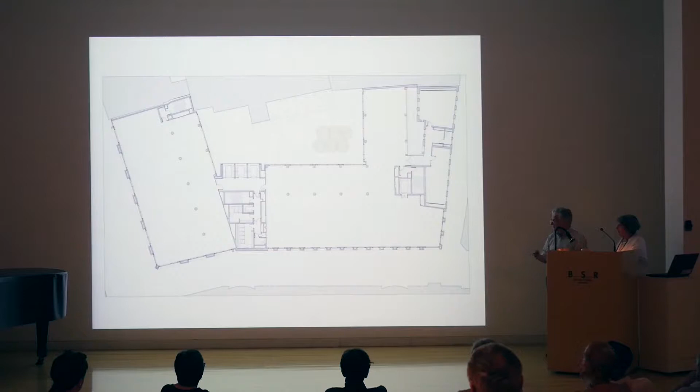This is the ground floor with the main entrance, the route to the courtyard, some simple office space on the ground floor, and the old buildings retained at the back. The main thing about offices, as I said, is the discipline. We have to reconcile straight commercial buildings, worth a huge amount of money in London, with the demands of architecture, urban design, and the street.

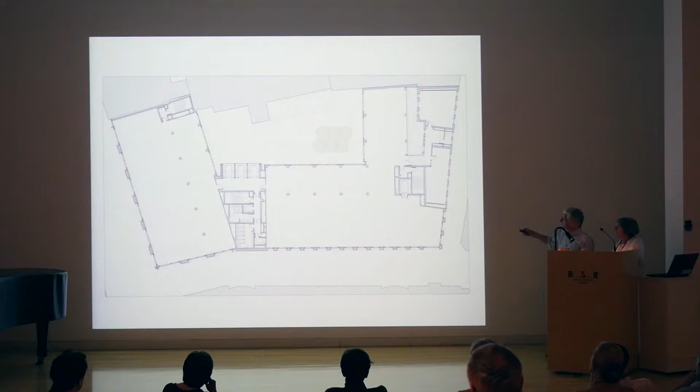So here we have simple rectangles to make up the commercial space, and a lot of planning goes into all of these. They make the angle turn the corner with the stairs and lifts, and they dovetail into the rear of the site with a small top-lit space to make the gap between the new building and the old building.

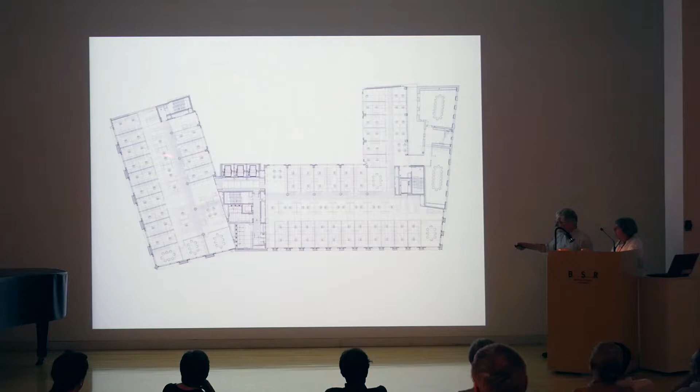This is the kind of thing that goes on inside office buildings, which I'm sure you all know, but this is for lawyers. Lots and lots of simple offices, three meters apart, must be six meters deep. We must have circulation here, a certain density, a certain cost. So we're working within a highly disciplined, demanding commercial environment to make something good for the city.

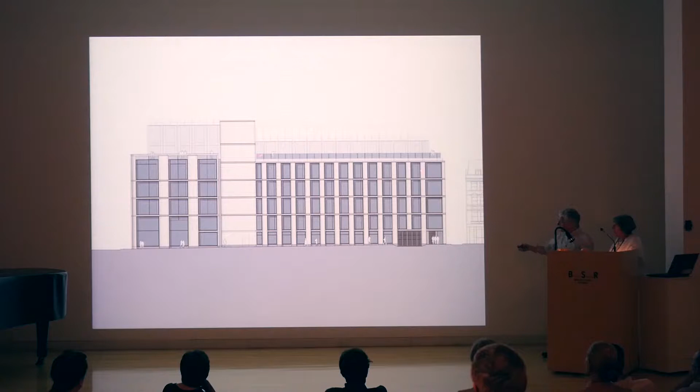So we try to reflect that in the facades. On the main street, called Chancery Lane, we have a larger scale to reflect its importance. On the side street we have a smaller scale, and it drops in height from seven stories to six, and round the corner to five and then four. On the main street, you never really see this view because you look up the street and down the street, never straight ahead.

The main element in the entrance is the courtyard, not the front door to the building, which isn't obvious when you're there—you go into the courtyard first rather than choosing to enter the office building directly. The scale of the building is different on this street compared to the side street. But then we built it.

Now this is where the surprising connection to Rome comes in, because we have this wonderful Roman travertine on the facade of the building, which comes from just down the road here. What we're trying to do is clad the building in a way that completely faithfully respects the structure inside. So this isn't just facadism, it's not just a veneer—it reflects the structure, the space inside, its energy consumption, its use, and so on.

So I wanted to take you through a little journey about how we made this facade.

So here we are in Tivoli, not so far away, and we discovered there were different choices of stone. One could have been a North European stone, a British stone called Purbeck, or Portland stone. Another could have been travertine.

The thing we were thinking with travertine is it can sometimes be a little bit too uniform. But we discovered in this quarry an amazing single quarry which has a grey stripe right through the travertine. It's quite extraordinary - if you look at the blocks which come out of it, it's called oniciato, I think. You get this amazing swirl in the travertine, which I've not seen anywhere else.

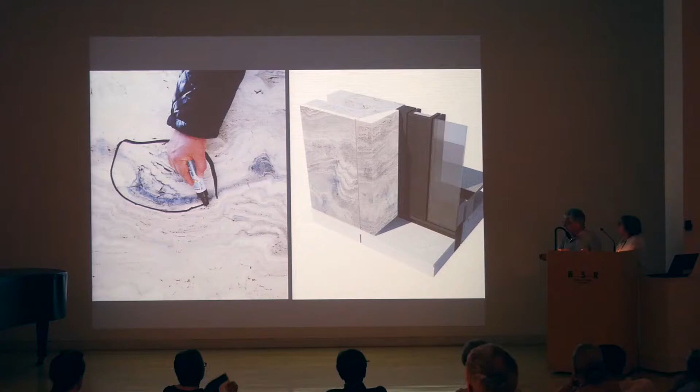Now, if you clad buildings with stone, which we sometimes do, it's always very unsatisfactory I think to see the thin edge of the veneer on the edge of the stone, maybe only 25 or 40 millimeters thick. So we wanted to give it greater substance. This piece on the corner is 120 millimeters thick, and it goes right the way through - you can see it's solid stone because the vein goes right around the corner. So it has the feeling of real quality about it, a little bit like the older buildings here, which are built of travertine too, of course, but there's a concrete structure behind with insulation in the gap.

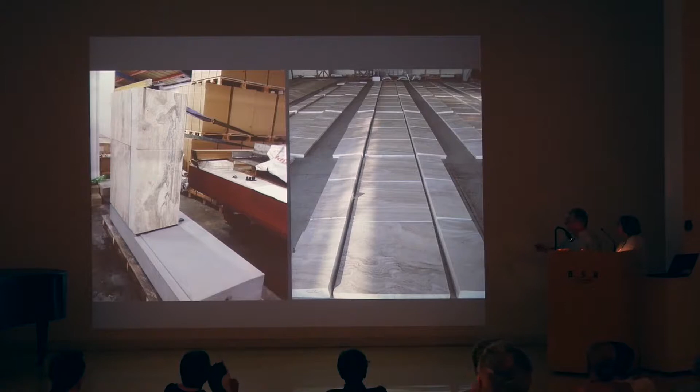Then we built a real mock-up, partly in our courtyard in the office and partly in the yard with the precast guy. And then we had Campolonghi from Pisa - I don't know if it's a company you know, but they're easily the best of the Italian stone manufacturers, we think. They took the travertine blocks, cut it into slabs in Pisa, laid it out in their workshops, and we could then arrange the slabs in different compositions to make sure we got a good balance of the crazy stone with the vein in it and the plainer stone in different parts of the panel. So an enormous amount of care was taken in getting this right.

And Alison went through this yard about 11 or 12 times over the period of 2 years to select the stone and get the guys to move it from one place to another. But of course the result is, I think, pretty good for the street.

This is the street taken looking south. You see the older buildings are all masonry. The windows are very deeply set, like most historic cities, so you don't see the windows, you don't see too much glass. So we have this pattern going up the street, and here we are with our building.

Now this facade is 0.5 meter thick, and most developers, most property companies would say, can you make it as thin as possible please, because it maximizes the commercial value of the space inside. And we said no, we want to give it some substance, so we made it as thick as we could. You can see the travertine from every angle and not much glass - it's absolutely not a modern glass office block.

And if you go to the outside of most cities - we went to Milan a little while ago - it's all glass office blocks. So is London, so is Frankfurt, so is Beijing, so are most cities around the world.

Why do we do the same kind of building all over the world? We're trying to make it a bit more contextual.

Looking down the side street, it has a different scale, much tighter grain, much finer detail. Looking along the main street, here's a piece by the front door, and right on the corner we have that difficult piece of how do you turn the corner. So like any building, you go around with an angle on the 45 degrees with travertine either side and precast concrete taking the corner, and then the concrete runs down the length of the street.

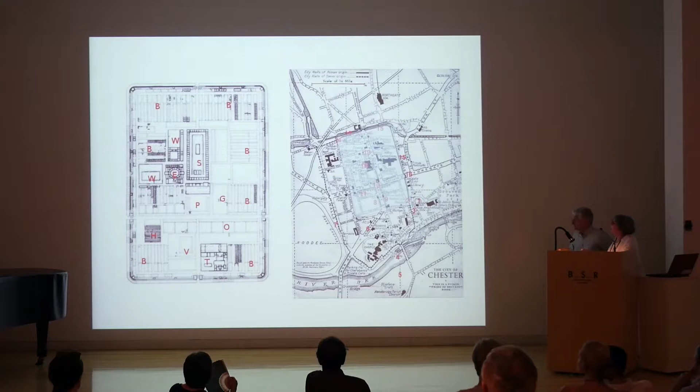And you can see it here, that the wider... Pointer's in the middle, that's it. Yeah, the wider part here was the end of the Forum, and then we have the cathedral and the town hall. The city suffered, like so many Northern European cities, post-war dereliction, lack of confidence, etc.

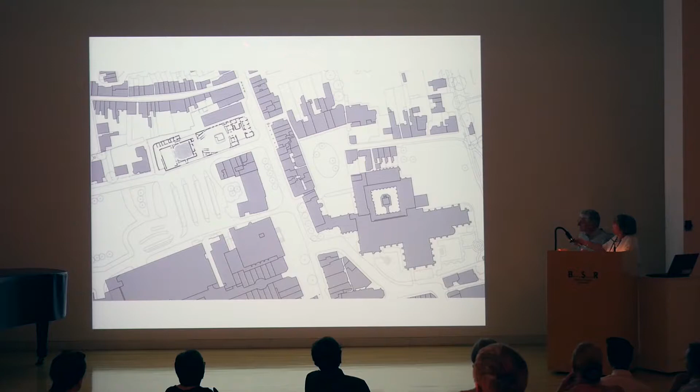So it ended up with quite a lot of areas which were left empty. This is actually a bus station, which is basically just on the surface. And this was our site here. It's a very, very long site, as you can see, and it's just to the south of one of the gates into the city.

What we were faced with when we started the project was that our client was actually the local authority. The local authority wanted to breathe new cultural life into the city because they realised that cities don't just need workplace, they don't just need retail, but they have a way of bringing people together, and culture and the arts is very important.

What they had was actually an Odeon Cinema. I'm sure you have many 1930s cinemas in Italy. The Odeon was one of the great cinema groups in the UK, and they built fantastic Art Deco cinemas in the 1930s. This is actually a listed building, a grade 2 listed building, not the highest grade, but not only historically important, but really important emotionally to the city.

So many grandparents would talk about going on their early dates there and tell their grandchildren about it. But it had been empty for 10 years. It had been converted to a multiplex, but the multiplex didn't work. It had been phenomenal in its heyday, when it was really popular. Fabulous Art Deco interior, lovely foyer spaces. Might not be our taste, but they were very important for the period. So they really needed to know what to do with this building and how to breathe life in.

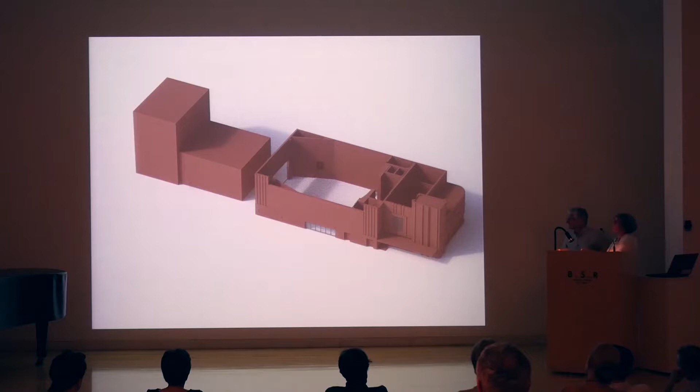So we came up with what is a very simple concept. We have the brick box of the Odeon, which we strip out, and we have a brick box which is a theatre with the necessary fly tower, so visiting productions can come in. And then we put a glass box inside the brick box for the cinema, and we wrap the brick box in glass, so you get a nice kind of companionship and a bit of a balance. And then we put a studio theatre on top of the new theatre.

And so we see it now in slightly more detail at the first floor level. So we have the original tower of the Odeon here. We have various rooms which can be used for library functions, the foyer spaces which come in to the cinema. And the cinema then has a route that can come down to break through the proscenium arch where the screen was, to access the new build theatre behind.

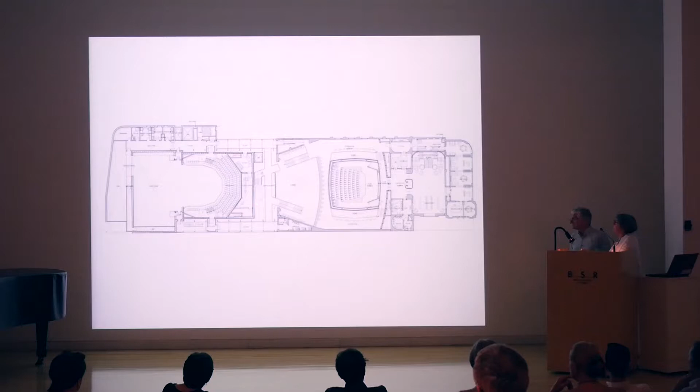Our client, Julia talked about working close with the client. Our client said, you're crazy. You're saying you're going to put a cinema inside a library, which is exactly what we have done, and that you're actually then going to fill the proscenium space with staircases and such like. And not only that, you're going to make them a major feature of the building. And we said, trust us.

Luckily they did. So we have the section. Again, reading from the right, we have the smaller spaces which can be used for children's library, etc., coming through the foyers into the cinema. The cinema is at first floor level, so it can project onto a temporary screen, and all of the ground floor area is cafe, bar, and more library space, book spaces. And then you break through the proscenium, and you get a very active vertical volume, with all the vertical circulation and links into it.

And then you come through into the theatre. I'll come back to the theatre later on, because it's got the fly tower, it's got 3 levels. This is really for visiting shows coming in during the year, and then it's got a studio up on top.

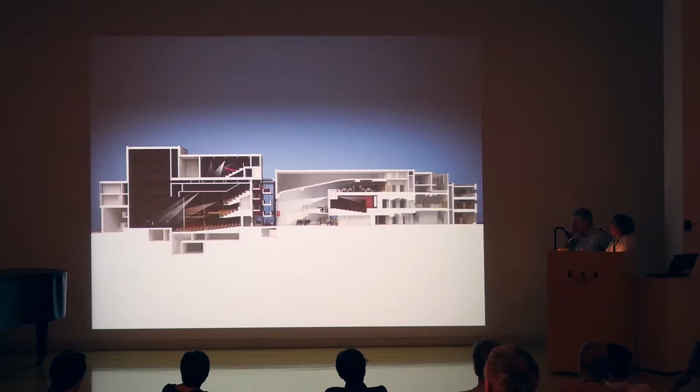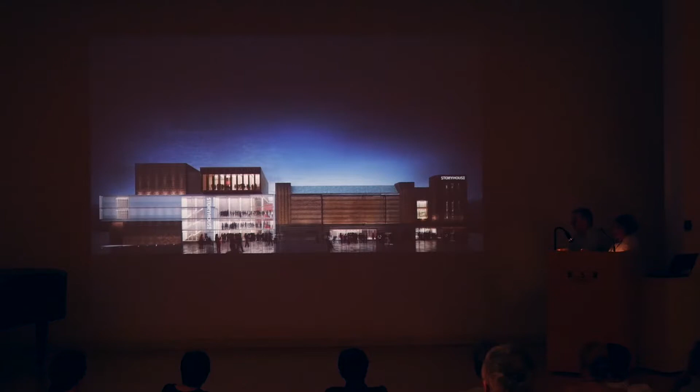And we were talking about representation. This is a computer visualization, and it absolutely captures what we were trying to achieve with the building. It was also captured in the rain, because it rains an awful lot in the northwest of England. So rather than showing it with fake sunshine, this is very realistic. But it absolutely shows the fact that we hoped to improve the proportions of the building by balancing the original brick box with the brick box wrapped in glass.

And a bit like Chancery Lane, this is an unreal view long term. Currently, you can see this image because the area over the road in the bus station hasn't been developed. It will be. This is actually going to become a street, so it won't be quite so open. But we do have the opportunity of opening up more entrances: the original entrance, another entrance into the cafe, bar, library, and then an entrance for the theatre as well.

And somewhere along the line, it became Storyhouse, the place where people come together. They read books, they go to the theatre, and they go to the cinema. They're all different ways of engaging with culture, from young children to much older people.

As I say, you can see there's a bit of a street there. This view will eventually be part of the street, and not quite so open, but you see the translucency, the transparency. We actually have the get-in for the theatre tucked away at the back. It's a very, very tight site, but this was one of those beautiful summer days that we do sometimes get in England. So it's looking straight on.

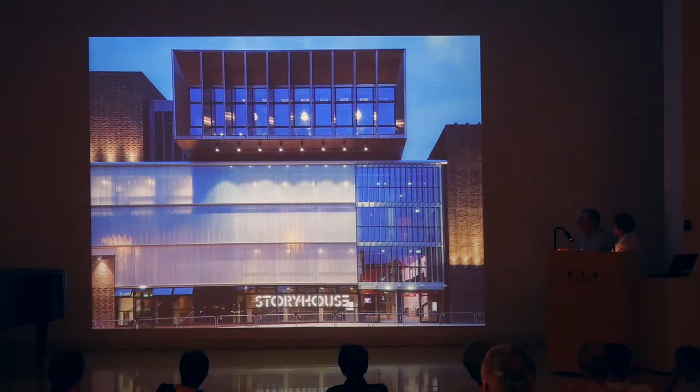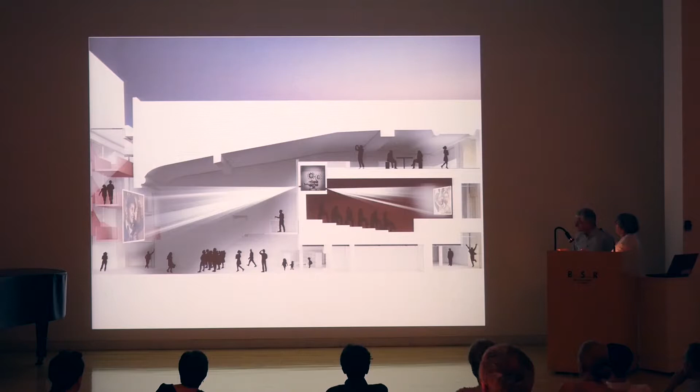We were lucky that when we started stripping out the building, we found that a lot of the original Art Deco plasterwork was still there. It hadn't been hacked off, and you can see this is where the screen would have been. This was actually our big opening through to what would be the theatre volumes beyond. And this is the section looking through at the different use of the cinema space, people using it in different ways, different types of day.

And then when it was complete, the original Art Deco interiors were refurbished to match the original glory. And there's just books absolutely everywhere.

This is the small cinema. It seats about 70, but it's been used for seminars, conferences. People sit on the steps and things.

And this is underneath the cinema, so this is the translucent glass enclosure to the cinema. And here we have the cafe and the bar underneath. During the day, it's a cafe, people come, but literally they just pick up books and sit down. And this building has had about 1 million visitors in the first year since it was finished.

And the number of people who have joined the library has gone up. There is no security. It's open from 8am in the morning until the final performance closes. And people can come in and they just literally pick up a book. If they decide they like it, they can then take it out on loan.

And then we've got the children's library. It's got much more intimate spaces used for storytelling and such like.

And then we begin to really play up the blood red circulation, as the artistic director refers to it. So we do have very animated circulation routes between the spaces, which help to inhabit the proscenium arch. So what used to be the projection area with people's stories being told, actually the scene now is the people of Chester who provide the narrative for what's going on.

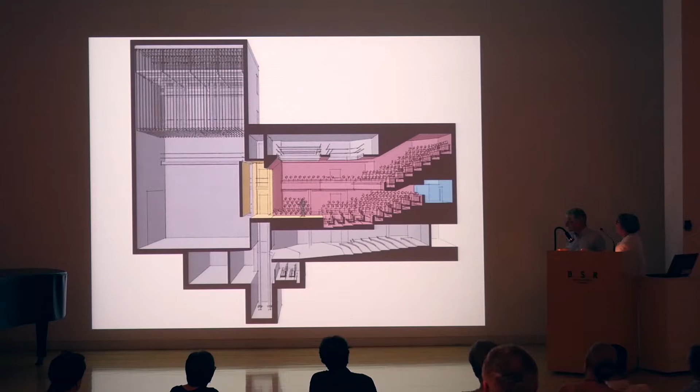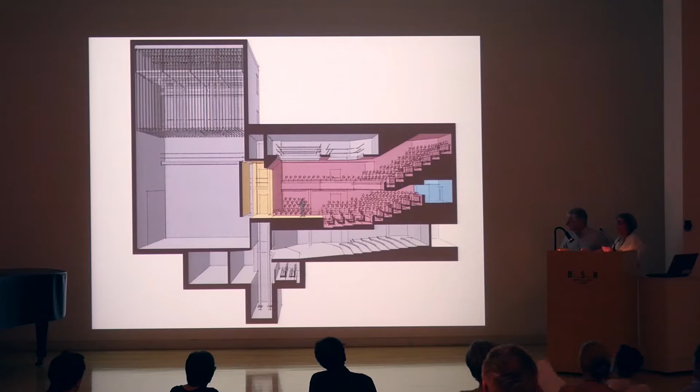We referenced economy earlier. This takes a week to put up. They use scaffolding to change it. It's not fancy hydraulics with lots of gizmos, it's just people coming in and reconfiguring the auditorium. As you can see, the structural infrastructure is quite considerable for a theatre building, with all the rakes and sight lines and everything else.

That's looking from the stage in the full three-tier mode. You can understand, when you look at all the kit they are used to playing about with, that actually changing and reconfiguring is just in a day's work for theatre people.

So this is when it opened in the summer mode with the thrust stage—looking out from the stage, and looking across the stage.

And then we moved back to London. It's interesting just to reflect on the theatre volume. There's only 500 seats, and I'll show you a picture in a minute of the Royal Shakespeare Theatre, which was 1,050 seats, but both of them trying to achieve a similar kind of intimacy.

Now, those are two buildings that we spent a little bit of time on, just to make sure we're okay for time this time. I thought I'd do a few buildings that we've done in other completely different respects.

This, you may know, if you know London—the King's Cross area. We've got St Pancras Station, where the Eurostar train comes in from Paris, and King's Cross Station alongside it. For many years it was a derelict area in the middle of London, very valuable but terribly polluted and with many landowners, so it was impossible to unlock it.

Well, finally that's happened, and it's now nearing completion. We've done 4 buildings on the King's Cross development, the ones in colour: this is an office building for the local council; this is an office and supermarket, believe it or not, with a gallery in it; this one is a sports hall; and this is a very large building for a very big IT company, initial beginning with F—I'm not supposed to tell you, but they're just about to start construction on that one.

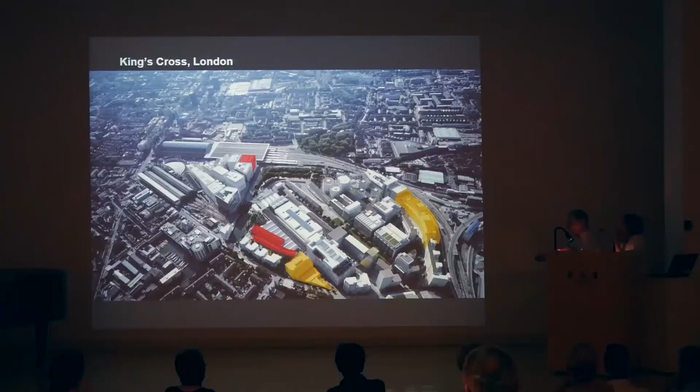Anyway, this one, just to give you an idea of the scale of it—this is the building for the local council. It has 10 stories of offices above a deck, and underneath the deck, which is up here, we have a library, a cafe, council services, and below this level we have a swimming pool and a gym and all kinds of other functions.

So the structure is incredibly complex, and we hang these lower floors in the middle from the big structure to make sure the columns don't end up in the middle of the swimming pool. It's quite a complicated building, but it turned out very well.

It was very sustainable—it got the highest sustainability rating of any large building in the UK, and then recently Bloomberg, the Foster building, got a slightly higher rating. So it's right at the edge.

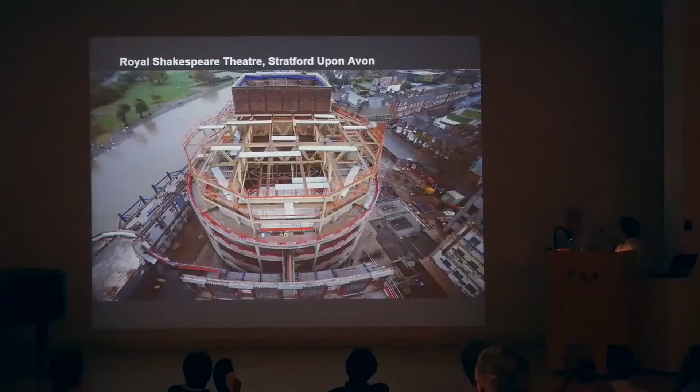It's really very simple, considerably more economic than Bloomberg—about a quarter of the... If you take the Royal Shakespeare Theatre, I'm just going to show you several projects in a run now.

Here's another incredibly complex building. It's right beside the river, which always floods—the River Avon—and it had again, like Chester, a 1930s building at the base of it. This is the fly tower; these are the walls of the original 1930s theatre, but it was designed like a cinema, so as you got further away from the stage it was like a fan shape, and the audience was farther and farther away and more dissatisfied, seeing the play 35 or 40 meters away. It was a very long distance from the back row to the stage.

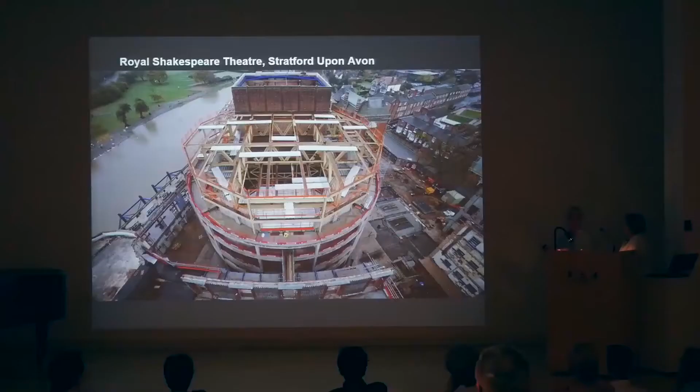So our instruction when we won a competition was to put in a new, much more intimate theatre where nobody was far from the stage. The director said, can you make it an auditorium that Shakespeare would recognize? That's a really difficult thing to do in modern architectural terms, but we built it out of column and beam—basically columns and beams around the edge in steel. It has a thrust stage going into the middle of the room, an audience on 3 sides, as densely packed as we can possibly make it, and it has these 3 levels.

So I've stood on the stage myself. When you're out there, it feels like there's a wall of faces right up in front of you, and nobody is beyond touching distance. When it was first opened, the atmosphere was electric, and you find people at the front really feel part of the play.

It's called a one-room theatre, instead of the audience here and the play on the stage over there, a two-room theatre. So this is a one-room theatre. There was somebody on the front row who was really upset at a murder going on, and she jumped up and said, 'Stop it,' in the middle of the show. They said, 'No, don't worry, it's not real.'

So it's a fantastic place. It's a really exhilarating thing to see Shakespeare played properly in a really good theatre designed for it. That's what it's like from the outside. It has a park on one side, the river on the other. This is what it's like from the town, a medieval town from the 14th century and earlier.

So you have a Victorian old building here, the 1930s building still there, and a new viewing tower at the edge of the street. You go up to the top and see the four counties Shakespeare wrote about. You can see his house, the school, and the church where he's buried. You work your way down and then get a ticket for the play.

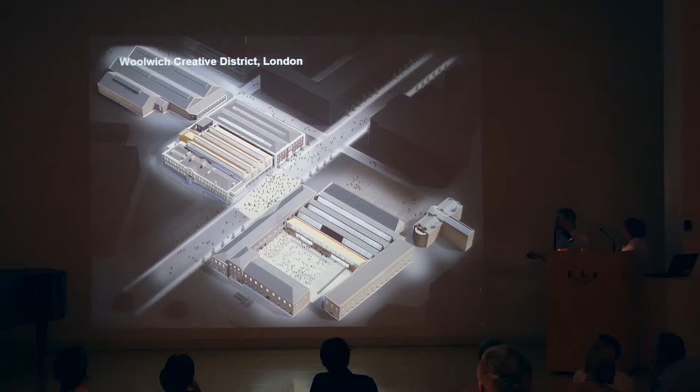Just to give you a feeling for what it's like, this is the concert hall. It's a most unusual place to put a concert because it has lots of columns - it would be impossible for dance, but it's okay for music. We tried a full-size orchestra in here playing Beethoven's Sixth, and the acoustic was fantastic. The fact that there are columns doesn't seem to affect the position of the orchestra or the enjoyment of the audience, and the acoustics are absolutely great.

Then you come out of that hall and we're building a new lobby onto the courtyard, so the courtyard will become another performance space or a market or something completely different. The local council, again, is the client for this. They could spend money on housing projects, which are really tricky at the moment, but they decided to spend some money on culture and make sure the whole place comes up, which is great.

Now this is back to Edinburgh, and we're going to finish in Edinburgh. So do you want to talk about the first Edinburgh project?

Yes, this is going back to Edinburgh in the 1960s. This particular area was bottom right in the very early plans that we showed - George Square, down here, is the heart of Edinburgh University as it is now. The original university is slightly off the screen, but this was the major 1960s development.

They built a couple of tower buildings here and just out of sight down here. I can remember going to school when this was all developed, with old tenement buildings, the traditional Edinburgh type buildings, and this was all demolished. Going back to Collage City, there were going to be 3 object buildings coming down here. They built the first one up at the top, to the north, and it was so unpopular they decided not to carry on and develop the other 2 buildings.

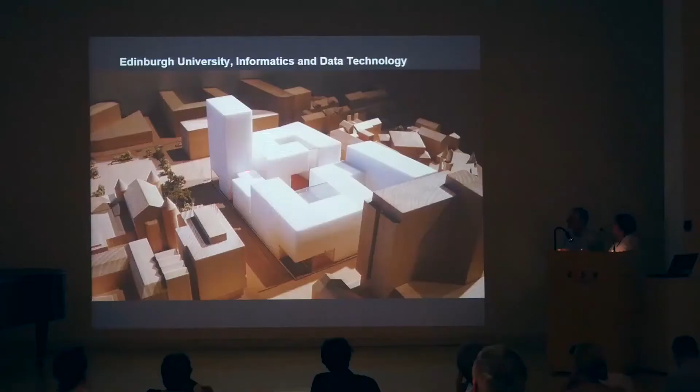They wanted a lot of cellularization, but they also wanted a lot of places for people to meet. They wanted places for serendipity. And serendipity is where you expect chance encounters to happen. But what we have to do is actually come up and fabricate the opportunities. We have to give people the opportunity to bump into each other.

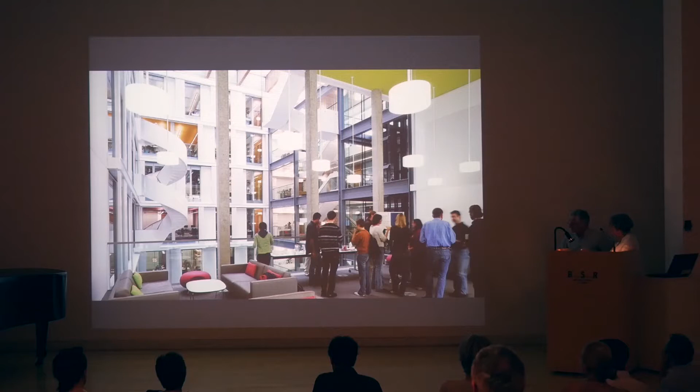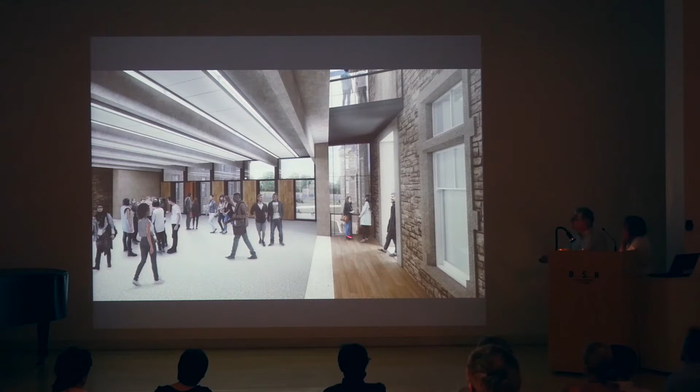If you go into the new wings, you can see the old walls inside, so that's pretty clear. Down in the event space underneath, here's the glass box reflecting light into the bottom, and we're trying out different colours here. It occurred to us that maybe we're missing something.

And it occurred to us that there's a metaphor here in the Edinburgh Futures Institute for good government. So I tried this idea out on some of the Edinburgh professors, and they were really thrilled with it, because they were thinking that this is an institute which hasn't had anything like it before - they've never done a Futures Institute before. So you look back to 1350 and you find paintings of good government, and that's a kind of metaphor for the building. So we're now looking at taking some of these colours and trying to find the identity through the building from one end to the other.